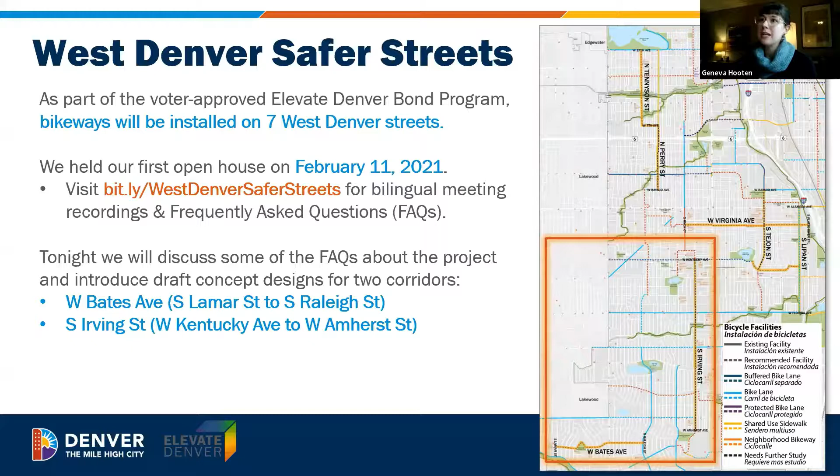Thanks. So as Chris was talking about, we are coordinating 7 different projects. All of these are Bikeway project goals. Tonight we're going to really do a deep dive on the 2 projects here of Irving and Bates, knowing that there's a huge geographic disparity between all of these projects on the west side, and we want to be able to really have a deep dive and a conversation.

So if you were able to join us on the 11th of February, we had lots and lots of questions, and we have worked on a frequently asked questions document that we will maybe link to in the chat. We're going to go into some of those projects more this evening and help answer additional questions. We're really excited. We're going to be sharing concept designs tonight and providing you an opportunity to learn how to provide input in this virtual environment.

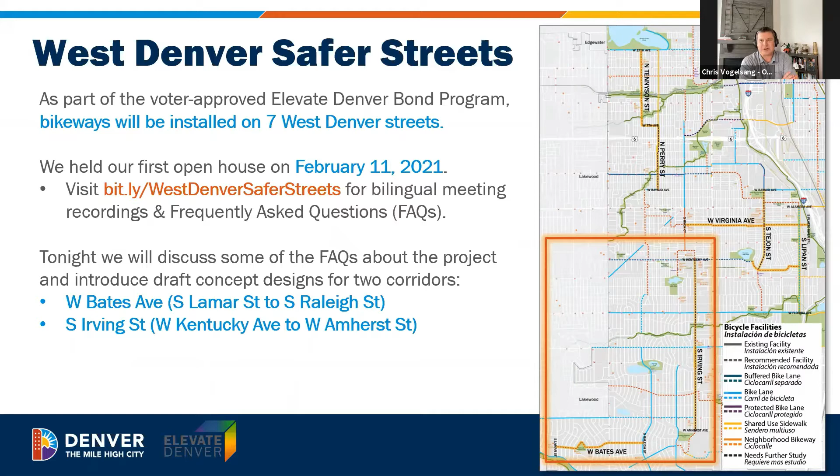Thanks. Thank you, Councilman Flynn, for eloquently describing the challenges we're facing here. We are excited to share this with you and hear all your input. So thanks for setting the stage for us.

Okay, Geneva, next slide please. So we're here in March, and as I mentioned, we had our first open house in February, and last fall is when we were able to collect a lot of data. As with any transportation project, we want to make sure we're making data-driven decisions that really meet where we are in Denver today. So we collected that data, did some calibration, and found we might need to make some tweaks to projects to make sure they're really fitting the character of our streets today with the speeds and volumes we have.

We've been working on draft concepts, which is what we'll be sharing this evening. Then we'll take all this content and feedback and turn it around into more advanced designs later this summer and into the fall. Because these are bond funded, it's a color of money thing, meaning they are funded and will be installed between 2022, maybe into 2023, but really we're hoping to have projects installed next year.

Tonight I'm going to run a couple of poll questions coming up, kind of in line with what Councilwoman Torres was talking about, to see who we have here tonight with us. We're going to demo how to use this feedback tool, and we'll have lots of Q&A. Then we're going to dive into Irving, talk about Bates, and close with some next steps. Through all of that we have Q&A sessions, so don't fret, we will have time to answer questions this evening.

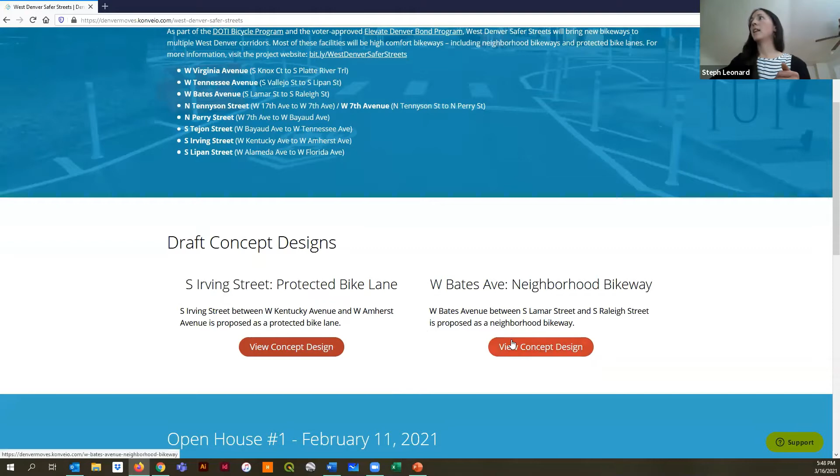So far we've published for Irving and Bates. I'll go ahead and click on Bates, since it has a little more information in it, so I'll start with this one.

West Bates is going to be a neighborhood bikeway. We get a lot of questions about what a neighborhood bikeway is, so we've linked to a handy bilingual fact sheet so you can learn more about how the city is defining a neighborhood bikeway.

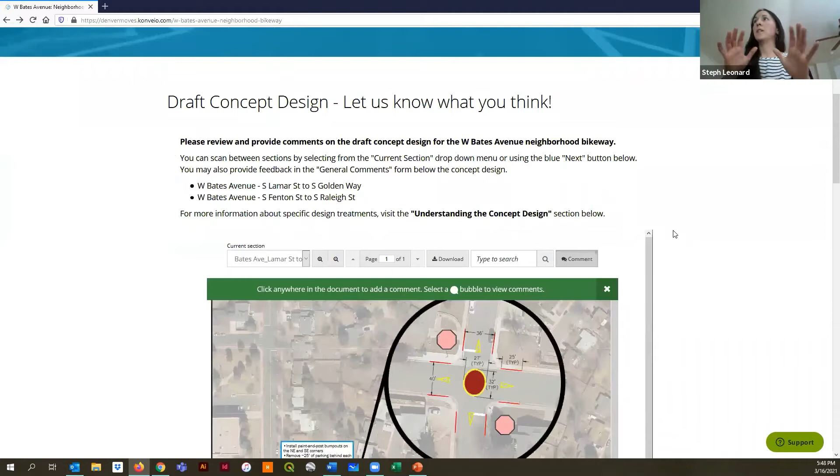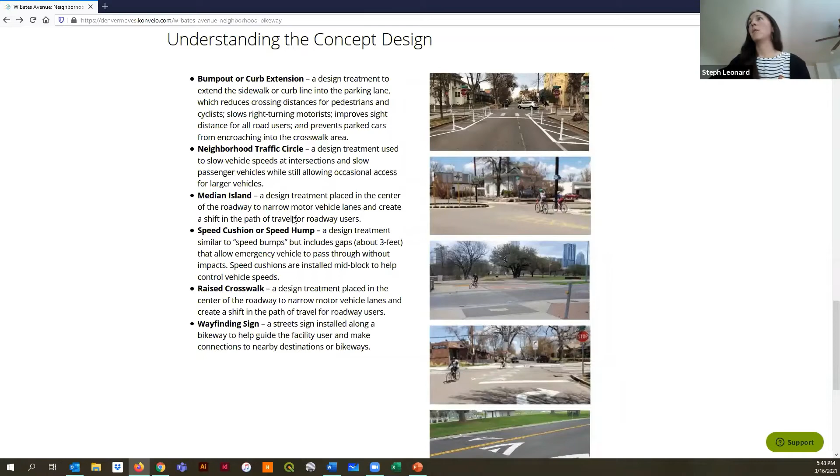This explains that we want your input on the concept design, and it's split up into different sections. We've also included content below to help you understand what you're looking at — the different components of a neighborhood bikeway for Bates, along with some pictures of what it might look like in real time.

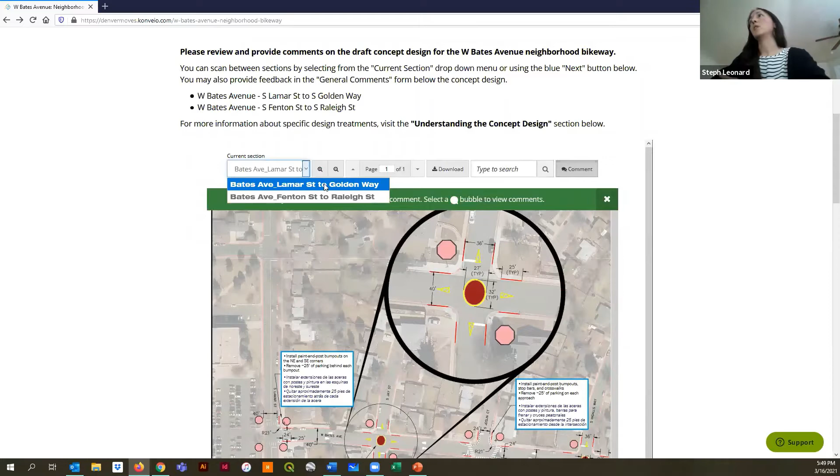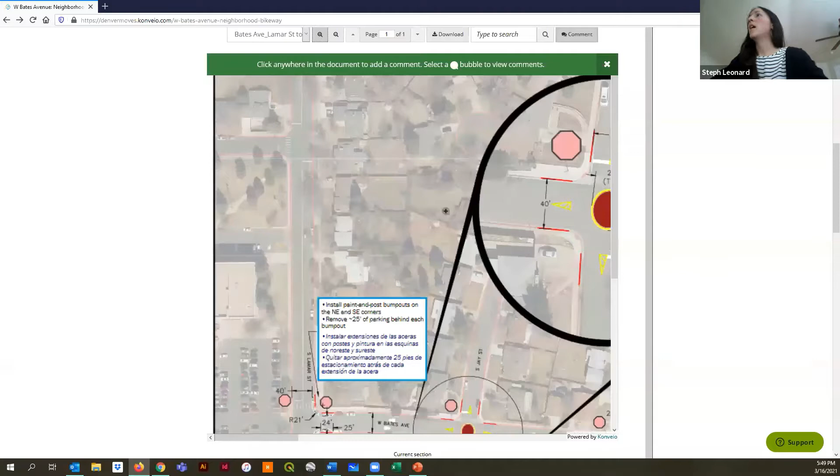So I'll go ahead and start. We have two sections for Bates, so you can switch between Lamar to Golden or Fenton Street to Raleigh Street. It's kind of hard to read initially, so you can use the zoom feature to see exactly what we have outlined in the concept design. For example, at South Jay Street, we're proposing installing a neighborhood traffic circle and removing parking on each side of the intersection — about 25 feet of parking. That's called daylighting, and it helps increase visibility at intersections.

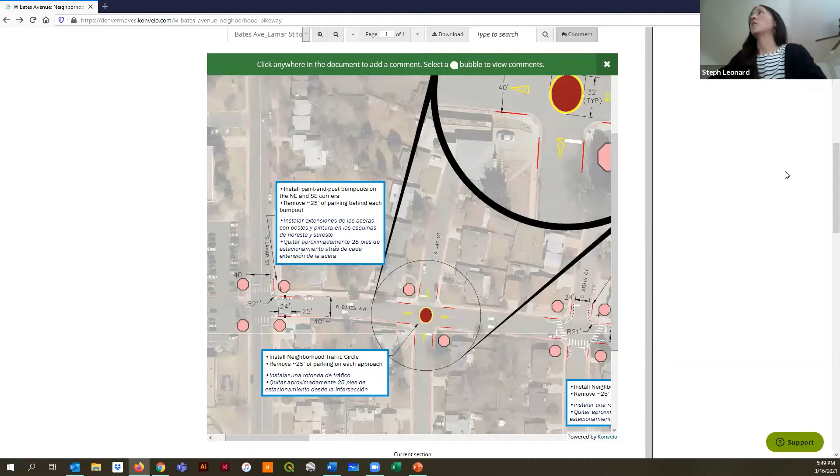So say you really like or don't like this feature or any feature here, you can go to this comment button. Once it's activated, you'll get a little plus sign. You can click on it and type in your information, add your comment. You don't have to include your email, but it helps us follow up with you directly afterwards. You can classify it as either a suggestion or a question about the feature, and that's when the email is especially important too.

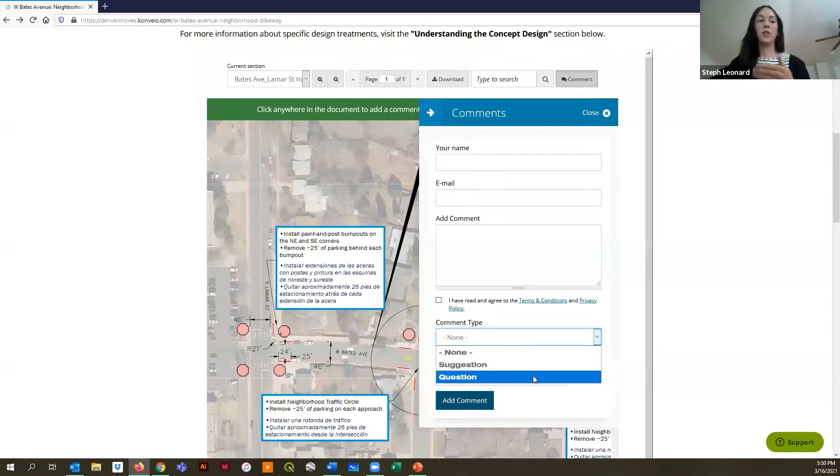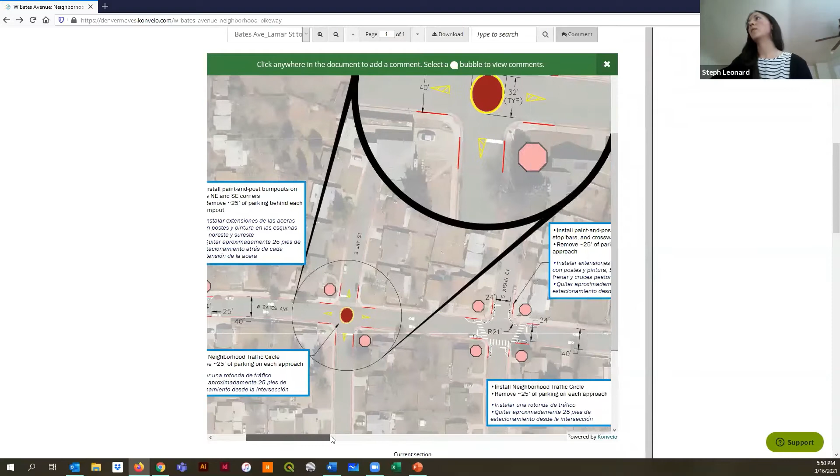And if you have a comment — well first, let me walk you through. You can scroll and maneuver around this single section. When you're ready to go to the next section, you just click next, and it shows you the next piece of the corridor. You'll have to zoom in and out again once it loads, so you can view it at the level you'd prefer.

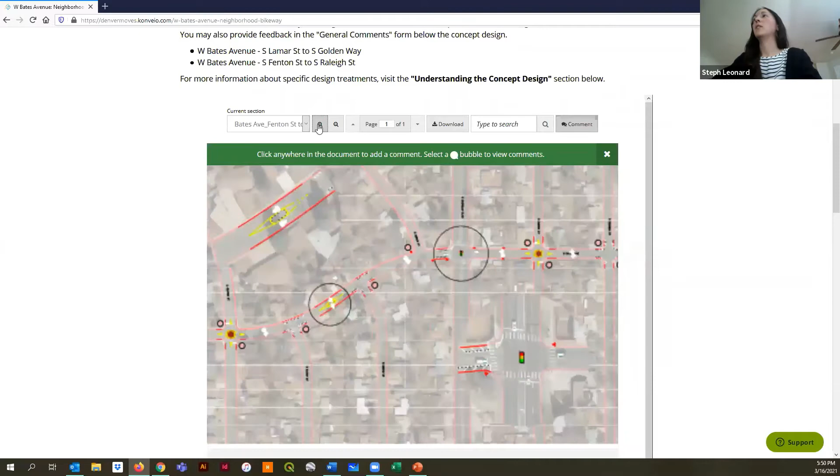And if you have just a general comment about a corridor, you can leave those general comments down here. You just have to confirm you're a human.

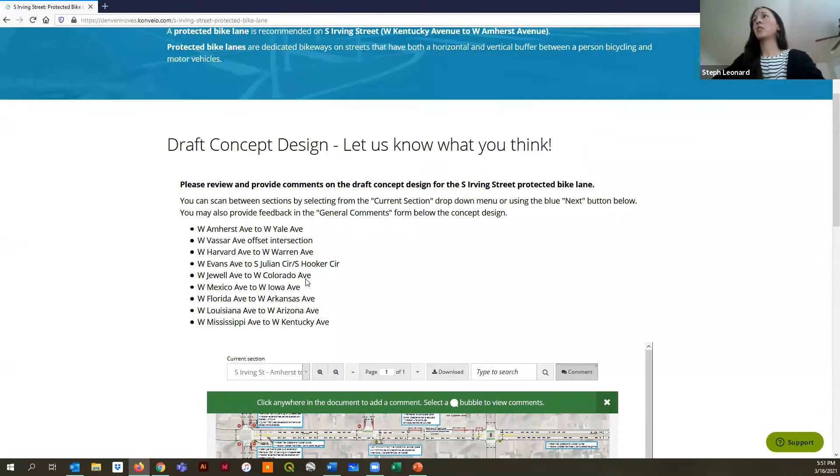I'll show you an easy feature — if you're wanting to comment on both corridors, you can just come up here to the corner and click between the two. Now we're on Irving, and as I'm sure you all know, Irving is a little bit longer of a corridor, so we have multiple sections here where you can do the same feature of zooming in. Right now we're at Amherst to Yale, and you can see what's proposed in this section specifically.

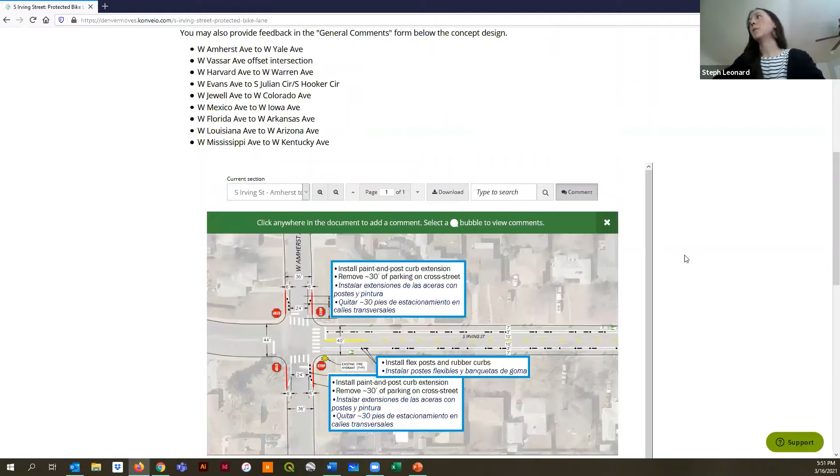The same features apply — you're able to comment. Once you see that little plus sign, you can add your comment. Something that's nice too, once you leave a comment, you can like other people's comments and reply to them, so it's a way of engaging with folks. Once this is populated, you can read through what people have said and interact with those comments as well.

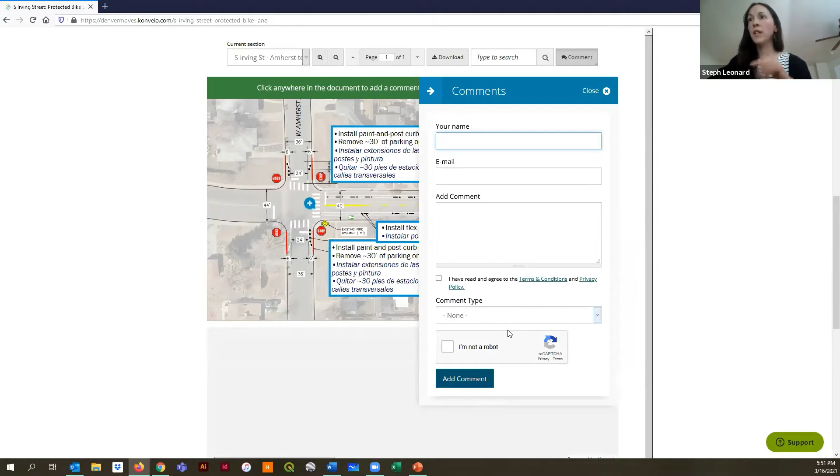And this has the same general comments piece. Just one final piece before I wrap up the demo. Down here, if you missed our first meeting, you can also catch our English and Spanish meeting recordings. This is also where the FAQ is linked as a bilingual version. And then just highlighting the multiple ways that you can stay in contact with the project team.

All right, so I'm going to stop sharing and we'll answer a few questions about this tool.

Yeah, great. Thanks, Steph. That was good. It's really important to us to run you through that so that you know how to give us specific feedback. There's a lot of information to cover in all the corridors, and everybody's really interested in the area right around their place. What this does is give you a way to comment right at the location you care about. And then another thing, Steph, is that other people can see the comments that got left so that you can see what your neighbors and different folks think as well.

So I think, go ahead, Steph. I saw one question in here: will this meeting be available to watch later for those who aren't able to see it live? Yes, we're going to be posting this video on the city website, but then we'll also be cutting portions out and putting it on the Konveio site so you can see specific content for Irving there with the concept design and how to walk through these concept designs.

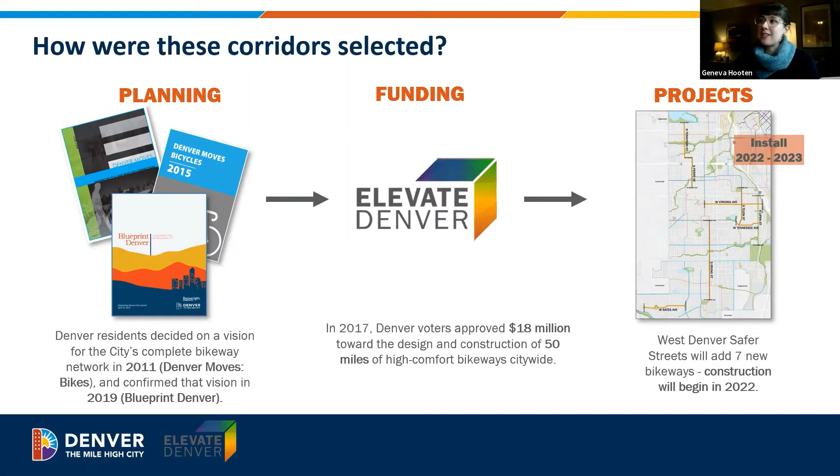We'll dig into why those are really crucial corridors. But you can imagine that's because they connect schools and parks and trails, and they're really connecting people across the city. And the funding, as I mentioned, these are bond funded projects as part of the whole suite of funding. So we have the opportunity to now bring those lines on a map forward and implement them. We're talking about lots of different corridors tonight and focusing on these two.

One of the really common questions that we received at our last meeting and that we've kind of been getting from the public is, why are these bike lanes here and how are they going to improve safety? The reason why we're calling these projects West Denver Safer Streets is because it is our goal as a city to help everyone get around safely. This is part of the city's Vision Zero efforts of eliminating all serious injuries and fatalities in transportation by 2030. One of the ways we can do that is by lowering speeds, and by adding more comfortable and safe facilities for people to go if they don't want to drive, for instance.

We also know that in general, wider roadways are correlated with higher speeds. So when we have the opportunity to narrow that roadway with something like a bike lane, we try to do that because we know it will help improve speeds and safety for everyone on the streets. And neighborhood bikeways, such as West Bates, is a street that we're really aiming to calm traffic on as much as we can. We're trying to bring speeds and volumes of vehicular traffic down so that it's more comfortable, so that you can walk with your families, feel comfortable being on the streets in a different way, and that it really is just prioritizing people who aren't in cars.

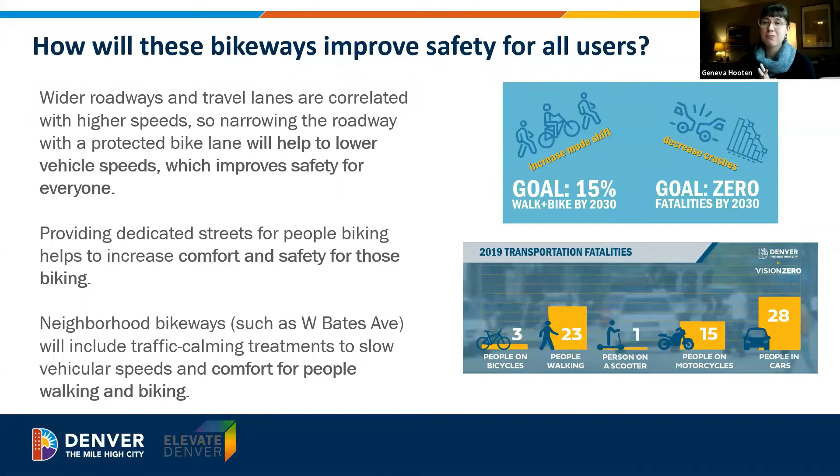Next slide, please. A couple of other questions that we've gotten and want to make sure are really clear. We get questions all the time: how will these bikeways be maintained? We know that Denver has snow, as we just saw this last weekend. So just like with other elements of infrastructure across the city of Denver, the Department of Transportation and Infrastructure will be maintaining the bikeways, including with snow and debris removal.

Another common question that we want to make sure is really clear: will trash, recycling, or compost pickup change? And the answer is no.

For both projects, we are proposing some changes to the street, particularly on Irving, and we'll talk about that more. In the design, there will be adequate space for trash and recycling bins in the buffer area, so people can still roll out your trash can on a Thursday night and it will be picked up on a Friday, just as an example.

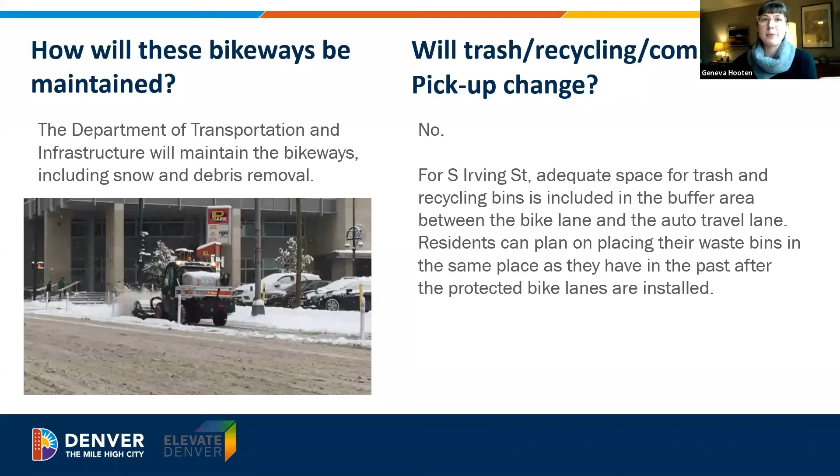And I am going to hand it off to Chris to dig into Irving, because I think we have a lot of folks here who are interested in that corridor.

Thanks, Geneva. Yeah, I was looking at the chat. There's a lot of interest in Irving, which I would expect. It's a very long corridor. We touch a lot of land uses, a lot of homes, schools, and different things.

And it has significant benefits and significant impacts too with our implementation. So let's just kind of talk that through.

Right now, where we are is we've been looking at a protected bike lane concept. Councilman Flynn talked about how it was a neighborhood bikeway in the beginning. We'll talk through why that change happened and why we are where we are today. But protected bike lanes are bikeways on street that have horizontal and vertical buffers, so they have things going up and down, posts or little curbs to try to protect the bicyclist area.

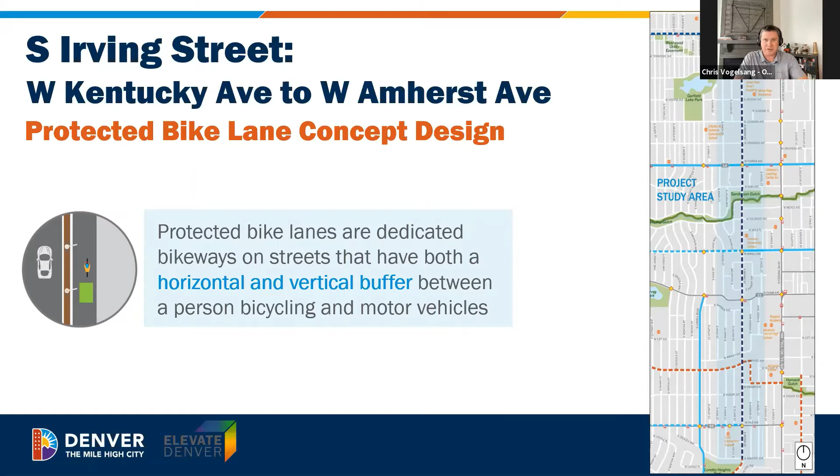And it also narrows up the roadway, as Geneva was saying. So not trying to skew this, right? I know there are challenges to this, but there are significant benefits too.

We've spent a lot of time over the last 2 weeks speaking with the schools along the corridor. A lot of feedback about speeds, about volumes, about crossing safety and access to the school by bike and different things. So we think that there's a lot of destinations on this corridor that could really benefit from a calmer street.

We're also looking at trying to create lower stress crossings for peds crossing Irving, trying to make that safer, trying to reduce speeding by narrowing the roadway up and narrowing the lanes up. A lot of bikeways along that corridor and a lot of transit connections too. So I think there's a lot of things on that corridor that make this a good place to look at something to do.

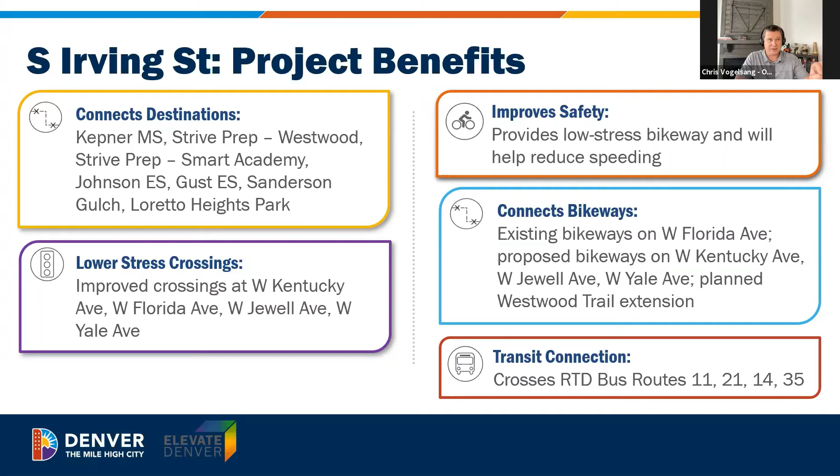So back to why did we end up where we are. So when the planning, when Denver Moves was done, the planning study in like 2011, it was sort of a high level look at the city, and the team then picked types and corridors.

And then as we got into this phase of the project, what we need to do is really understand the street. So we've gone and looked at every block, measured every block, measured speeds, measured volumes, looked at crash history, looked at parking data, looked at striping, where traffic signals are, where stop signs are, the whole gamut of elements to try to understand Irving Street and what it's like and what we'd like it to be, what the community said they'd like it to be in the planning study.

The reason that it doesn't work as a neighborhood bikeway is real evident from these parts of this slide. We have speeds of 30 plus miles an hour measured along most of the corridor, pretty high speeds. We've heard a lot of stories from talking to residents about accidents that have happened, speeding by their home or the schools. And the volumes are very high too.

Irving is really a collector street, it's kind of in there. The parking, so we did look at parking, and this stat's a little misleading, but in the whole corridor, the parking is about less than 20% occupied. There are places where there's specifically high parking occupancy, especially near the multifamily, and then some needs near the schools that are really obvious. So we've been trying to look and understand that.

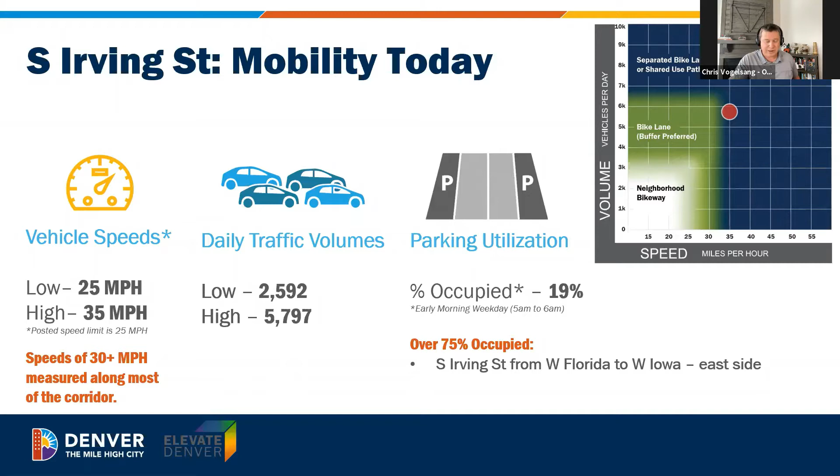So that's where we're at, and that's why we're looking at it. And we understand that there's impacts, so we want to talk about that. Let me show you, I want to make sure we're all on the same page about what it is that's being proposed.

So this is a typical section. What that means is, like, if I were standing on the street looking down the street. This particular spot is near Vassar, looking north. I know the widths are a little different in different parts, but this is a pretty good example of what we're doing. So we're showing 7-foot bike lanes, 3-foot buffers with vertical barriers, and 10-foot drive lanes.

I know there's been a lot of questions about why can't we fit parking and all the elements in. You can see that the space is really challenged, and with the engineering guidance and criteria we have about needing to protect this, that width becomes difficult to allocate to make everybody happy.

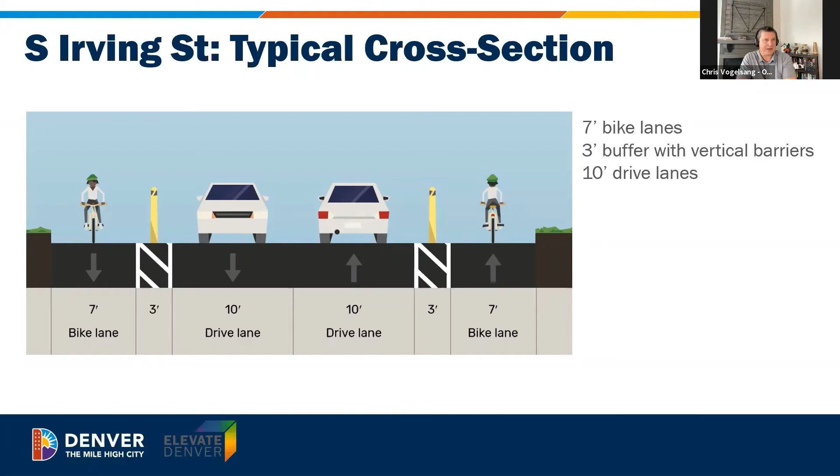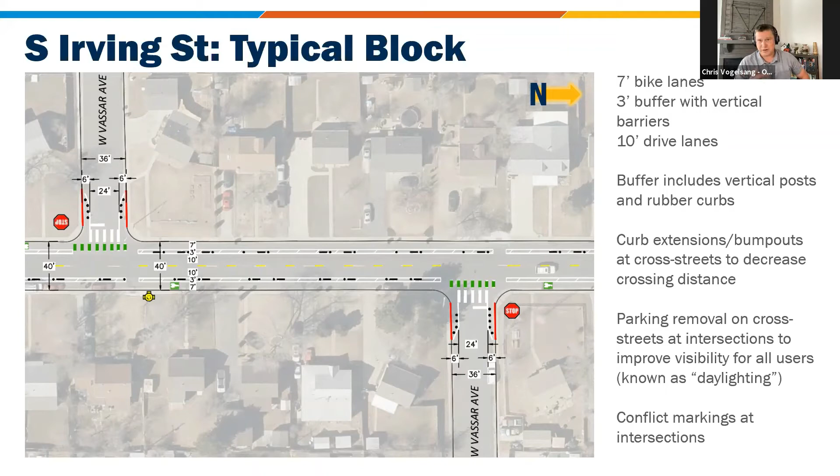The other thing to take away from this is, just like we've been seeing in the chat, this section requires a total removal of on-street parking along Irving. We know that is a big issue, and so we want to talk about that, but wanted you to understand what the trade-offs are and how we're addressing the problem.

So that's what this slide is about. The parking impacts — we are proposing the removal of all on-street parking. We are looking at the school areas and a few other key locations to make sure we can accommodate bus loading and different activities like that.

We are looking at disabled spaces, so handicap spaces along the street, and we're maintaining those in key locations. One thing about that — if you do not have a handicap space today and you think you need one or qualify for one, we will help you get in touch with that application process and make sure we can help you navigate that. I want everybody to know that.

We think key areas of impacts are really near multifamily residential. We notice a lot of on-street parking activity near there, so we need to look at those a little closely. There's some really long block lengths in this area where if you had to park on a side street, it's quite a ways to get back to your home. So we're taking a look at what we could do in those places, and then near parks and schools.

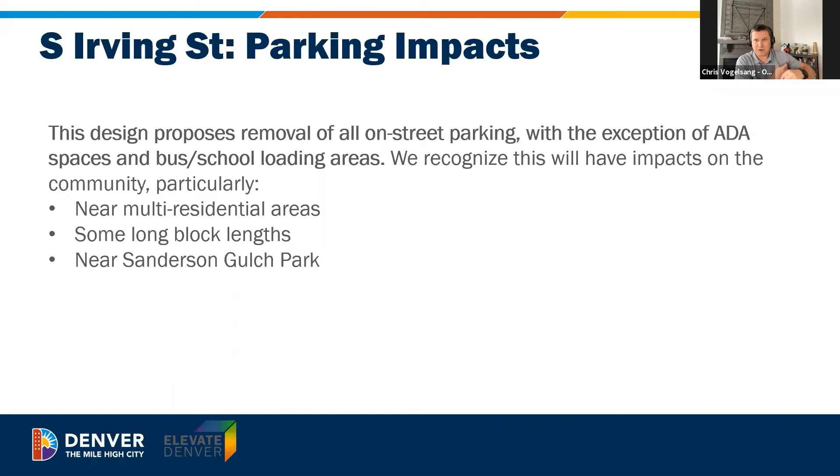Okay, so just to address it straight up, because we fear people are going to ask it: why is parking being removed on South Irving?

It's an important community corridor connecting churches, schools, and community resources. The speeds and volumes are very high, so in order to do a safe facility, we need to protect that facility. We think that protection also has speed benefits, reducing speeds along Irving, which will help everybody. Due to those speeds, we need additional pedestrian safety enhancements, which I was alluding to when I showed you the bulb outs and different things.

Unfortunately, the existing street width means we can't do everything in the space we have. So this is where we are today, and this is the direction we're moving. We understand it has a lot of challenges for people, and that's where we are - we want to present the ideas we needed to get through, show what a concept would do, and share it with you, so you can come back and tell us you love it or hate it, or share some ideas.

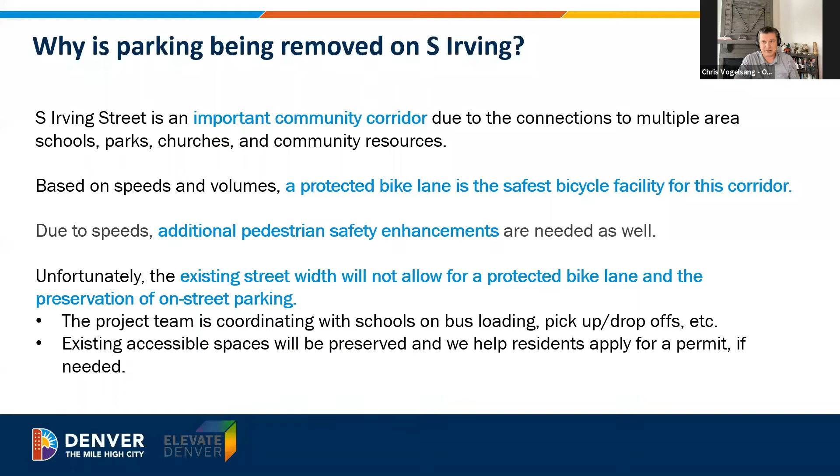Doing some observations, we saw that in most places the parking utilization is pretty low. We understand that most homes have driveways, and we know there are a lot of challenges with the new multifamily, or more-people-per-household ordinance, and there's no alley-served access. So we want to work that through.

We also looked at the side streets - I want to make that clear. We looked at Irving, and we also looked at a block on either side of Irving to see how those streets were. We found in almost all places the parking utilization was pretty low, so take that together with the long block lengths and the multifamily housing as a total picture of what we see.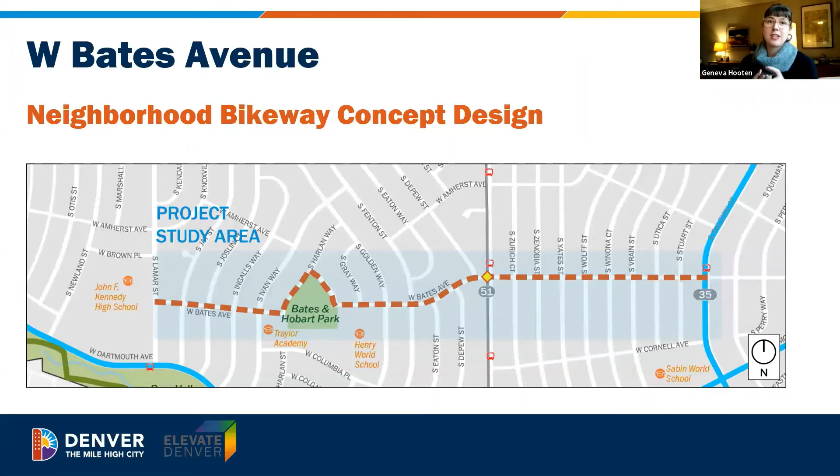So this is what we consider to be a really prime candidate to become a neighborhood bikeway. That's not necessarily a term we've used a lot in the city thus far, but it's a great way for us to provide more pedestrian and safety benefits and just calm the street and make it safer for everyone. It connects lots of destinations, tons of schools, connects to the existing Raleigh Street bike lane, connects with transit. We're also interested in providing a more comfortable connection across Sheridan, understanding that's a pretty big separation east and west between the two parts of the corridor.

And so you're probably wondering, what the heck is a neighborhood bikeway? Well, this is a shared street that is low volume and as low speed as we can get it, and it prioritizes people who are walking and biking.

So the way that we do that is by lowering speeds by adding things like speed humps, traffic circles, curb extensions, median refuge islands to help you cross if the street is a little bit wider. If we have more volume on a street than we would like, we will add a diverter. There is not that issue for Bates, so we won't be diverting, but that is one of those tools in the toolbox to say, we just won't allow for through traffic.

We also are focusing at the intersection as much as we can. So for instance, at Sheridan, where it's signalized, and other places along the corridor, if we can add crosswalks, if we can slow traffic as it moves through the intersection. And then this photo that you can see in the lower right-hand corner, this is Bayaud Avenue, kind of in the West Wash Park neighborhood. And you can see what this looks like. This is paint and post curb extensions that even though that is a fairly nice crossing, it just makes it a little bit shorter and easier for pedestrians to cross.

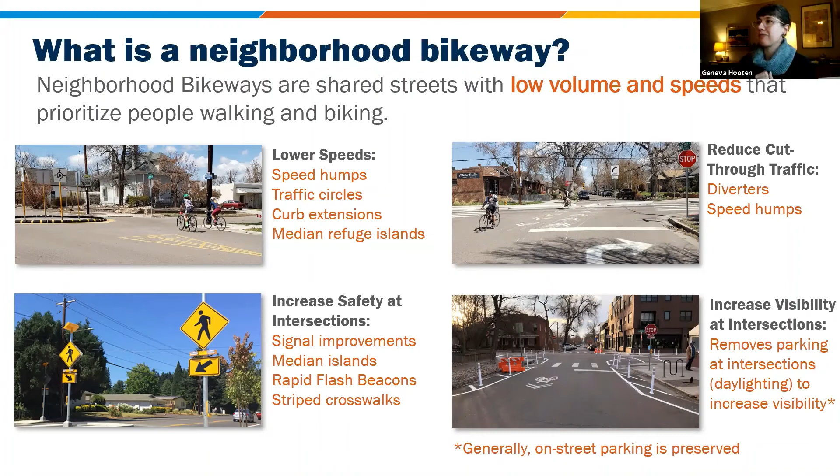And so as I talked about, we have a lot of these different elements that we're going to get into. Raised crosswalks is one that I didn't mention before. And what that is, it's almost like it combines a crosswalk and a speed hump. So particularly we see those at intersections where we just want to add a little bit more safety and make sure that it's extra comfortable for people to cross the street. And it also slows vehicular traffic because they have to go over a speed hump.

The last piece is wayfinding. And that is actually part of our new standard on all of our bikeway projects. We will be adding these incredibly cute wayfinding signs. I want one for my own living room where they have bears on bikes. And it's a goofy sign, but it's also just showing that these are places for kids, it's places for families. It's really a place that we're trying to make as high comfort as possible.

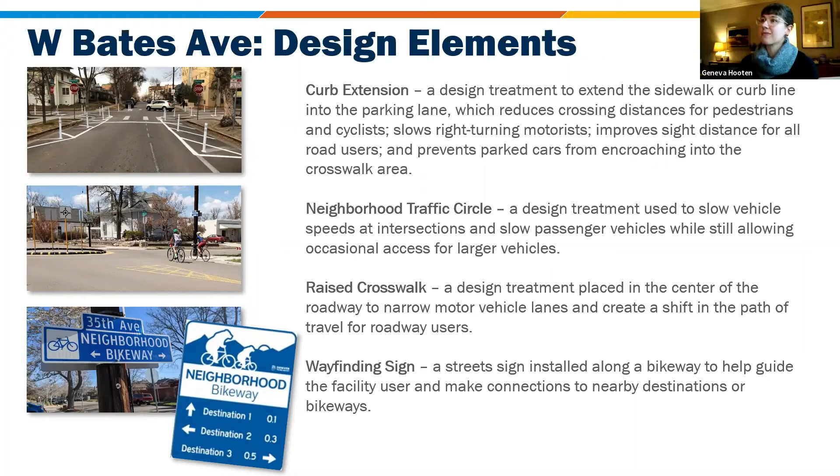And so why this street is good for a neighborhood bikeway and why it's really different from Irving is that while it is a posted speed at 25, the prevailing speeds that we see are lower than that. They're still higher than we want. The target for us is as low as 20, if not lower. But the speeds are just in a much different kind of category. And then those traffic volumes as well, you can see are as high as 1,550 a day and as low as 495. And that's great. We like to see low volumes on the streets because it means that there are fewer kind of conflict movements for there to be if you're biking and you have a car going around you.

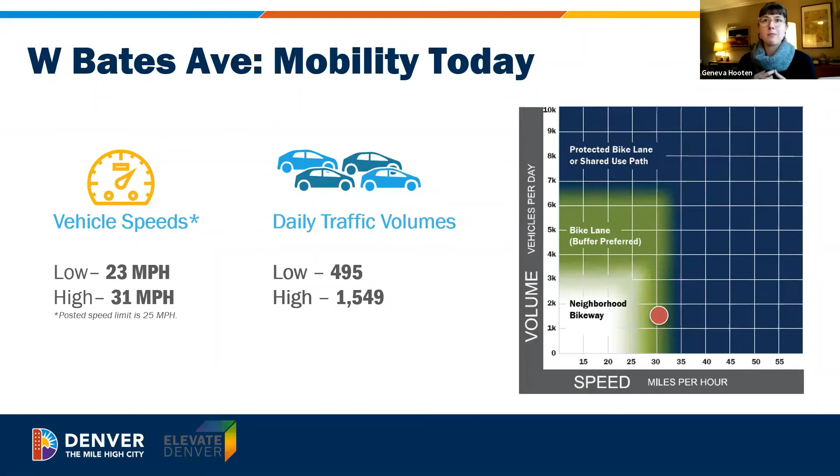So what this looks like in practice is, this is the example that Chris had shown earlier. And at every intersection, we're really focusing and saying, how can we make this better for people who are walking in their neighborhood and accessing the park? And how do we make it a little bit more comfortable if someone is biking on the street? So you can see the kind of bigger circle that has a red circle in the middle of it, that is a traffic circle. And so what that will look like is it just means that it's almost like a mini roundabout, and you just kind of go around it. It slows movements through the intersection, and it means that you have to go around the intersection and then reestablish yourself in the lane.

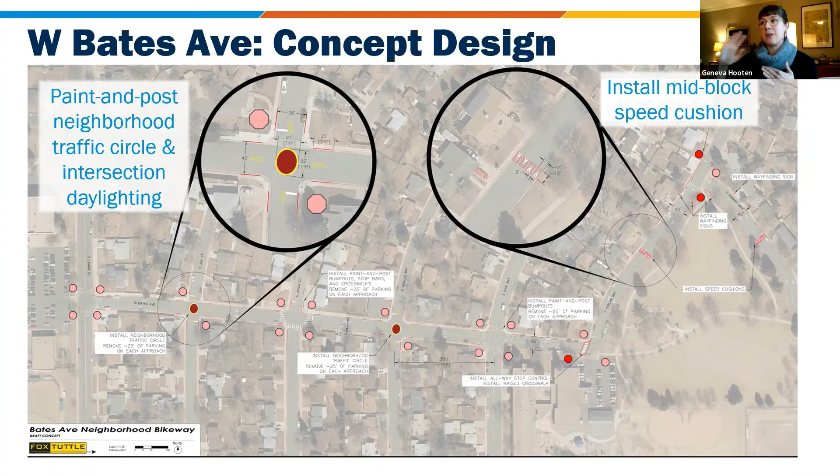And so what we're doing is we're adding some kind of a pattern of curb extensions and traffic circles. And the curb extension is really similar to that photo that I just pointed out. And all that does is it shortens the crossing distance. It means that anyone who's crossing the street is a little bit more visible. And so the combination of those together will really help lower the speeds. So you can see that in the pattern from Lamar over to the park. We have raised crossings, we have speed humps or speed cushions, and we're generally just trying to calm the street as much as we can, kind of keeping with that neighborhood character of residential and schools, knowing that there is a lot of pedestrian movement and people who are walking and trying to get to the park. So that's what you'll see in this concept design.

And then a couple other things I want to point out. Just in front of the school at Gray, we have a little bit of narrowing effect going on. So what you can see is it kind of provides a pinch point of sorts at a T intersection. If you're coming, one of the highest points of speed we have along the whole corridor is right here, so in particular we really wanted to mitigate speeds there. That also provides a shorter crossing distance for anyone accessing the school.

The circle on the right is of a median in the middle of the street, and that is just to provide a little bit of friction so that cars will go slower on the street itself. So you can see that this kind of bikeway treatment is really different from Irving because the street itself is quite different.

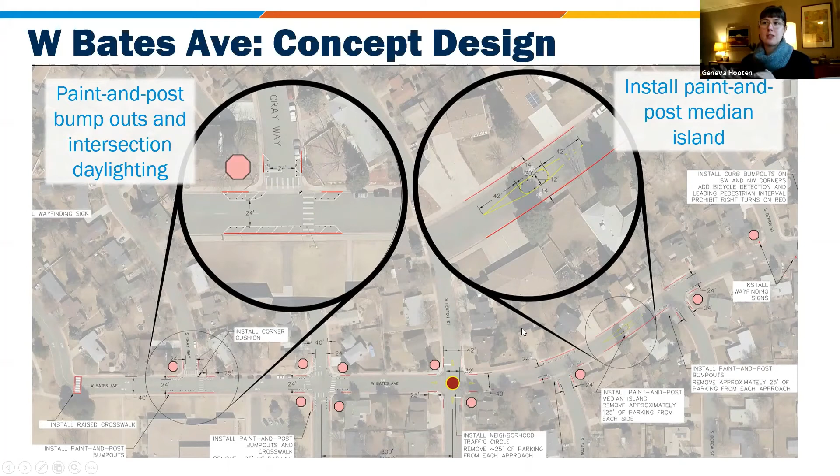Cool, yeah, thanks for walking us through that, Geneva. And yeah, I think that's the key point, is they're very different streets and they have really different safety needs.

Steph, I'm going to stop sharing for a second and love if any questions related to Bates might have come through. Love to chat with people about those. Yeah, so we haven't gotten any Bates specific questions so far, but we do have a few general questions. One person asked how these comments that folks are leaving on the draft concept designs will be used, and how the city can use those to address any specific concerns.

So I can split the answer. Yeah, I'll start and then I'll let Geneva pop in. So from a design perspective, I'm leading the concept design piece, the engineering piece that lays out how the streets all work. We will take those specific comments into account. We really want to know if there's a certain place where things happen, if there's a safety issue or a need, or maybe something we might not be aware of, because you guys are the experts about the street in the area. By using it, we will incorporate those things.